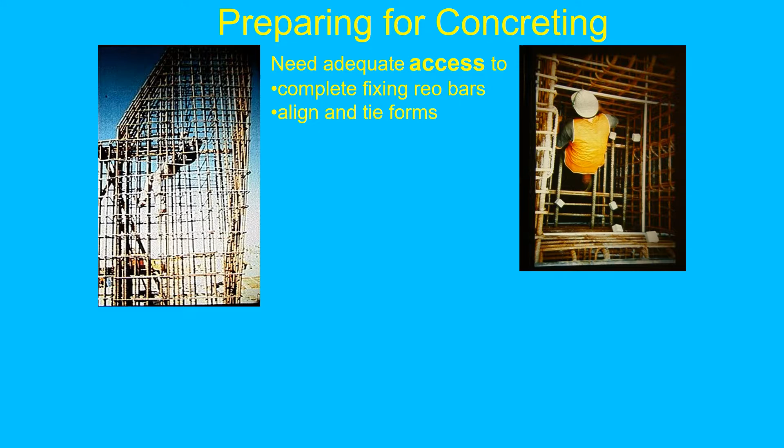My main focus will be not on the concrete structures, but on the structures of formwork and reinforcement into which the concrete is poured. I want to take you inside these cages to help you appreciate the problems faced by the concrete workers. These problems are mainly about access.

Access for concrete, access for vibrators, and access for workmen, so they can do all the things listed here without too much discomfort. Finally, there has to be access for light, so that the flow of the concrete can be observed, even at the bottom of the pour, and particularly as it forces its way through the outer rebars and into the cover zone.

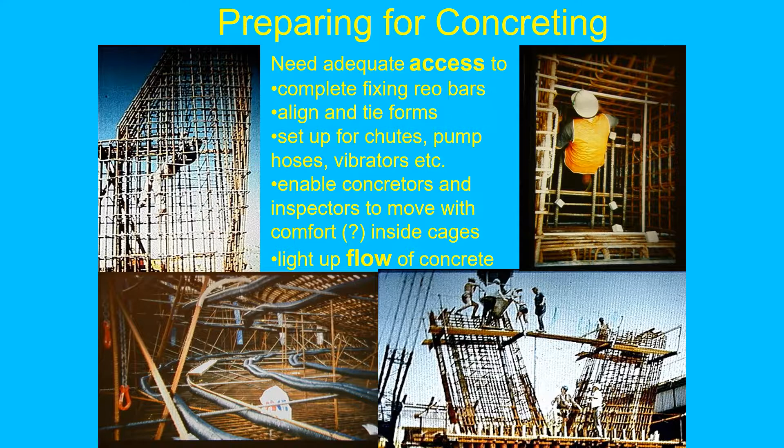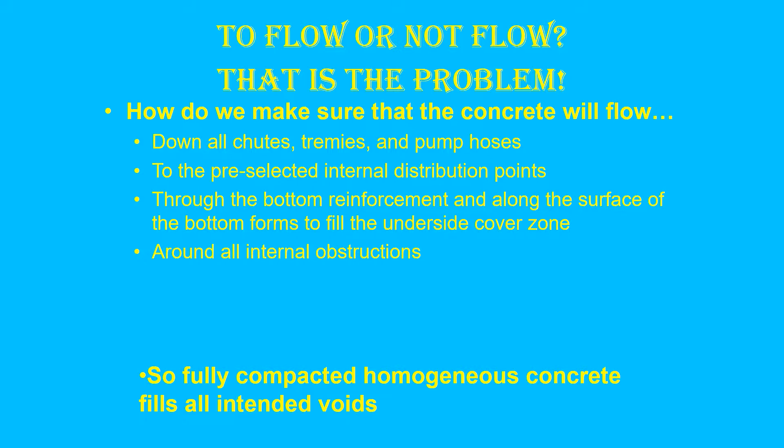Problems occur when concrete doesn't flow. It has to flow from the pump down to the bottom of the pour, then along the bottom, around all obstructions, through the gaps in the rebars and into the cover zone.

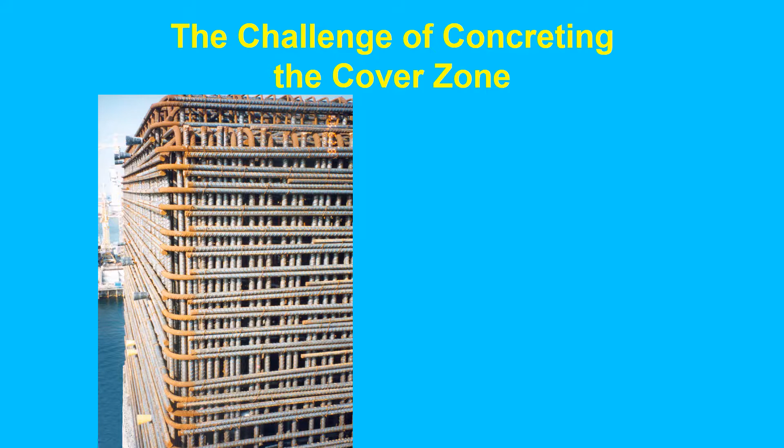The challenge is to get concrete into a cage like this so that it drops cleanly to the bottom and then spreads outward and upward, filling all intended voids, and particularly the cover zone between the outside reinforcement and the forms. The white wavy lines indicate how the surface level of the cover concrete rises progressively as it is forced out through the available gaps in the almost solid wall of reinforcing bars.

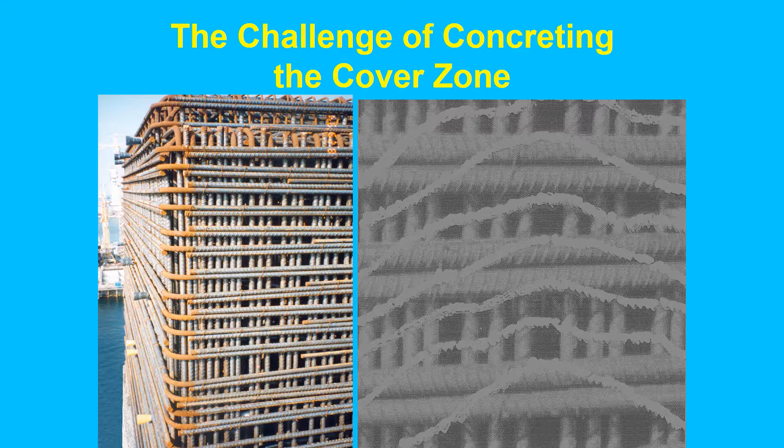Now here's another problem. The problem's in Pier X, not in Pier Y. It was the designer's fault in the first place. See how the throat bars in Pier Y stop short enough to provide some sort of access?

However, in Pier X, the throat bars extended full length and blocked off all access, even for pump hoses or chutes. It's difficult to control a vibrator when operating only from the top of a tapered column like this one. The designer's detailing for the throat bars was a major cause of the failure.

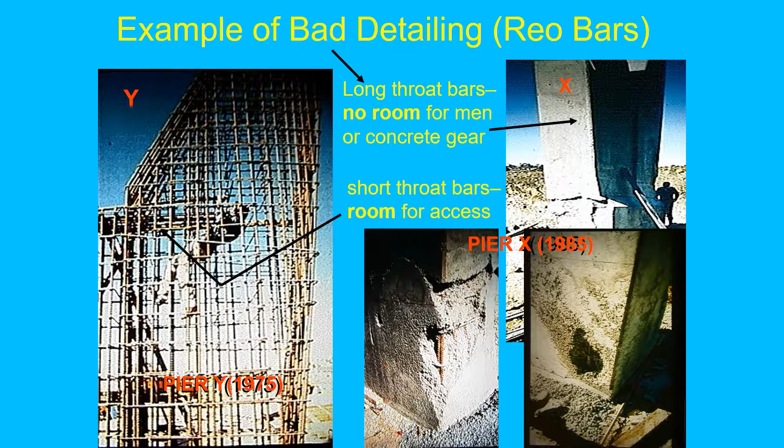Nevertheless, it was still gross carelessness on the part of the contractor. He's supposed to prevent such problems, even when they are caused by the designer. One way to overcome such a problem, without requiring a design change, is to use self-compacting concrete.